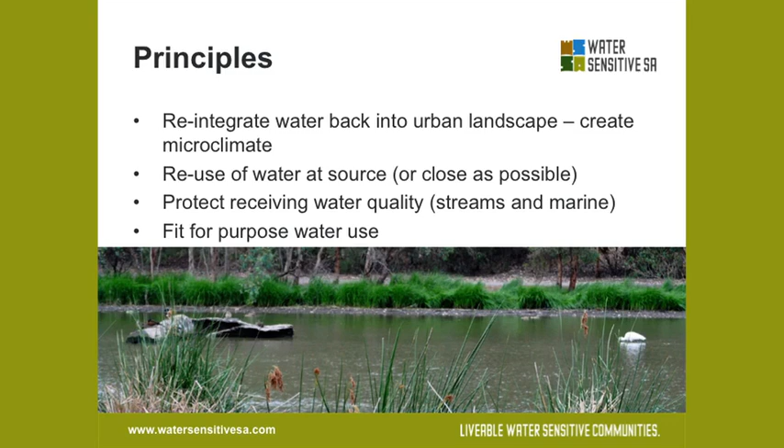Some of the things that really drive what we do, and I'll be putting quite a bit of emphasis on this tonight, is getting the reintegration of water back into the urban landscape, particularly to create microclimate for urban cooling. I'll talk more about the changes in the landscape from creating impervious areas, but really it's transforming our city, and we need to take the front foot and see how we can do things better, because increasing imperviousness is really a surrogate for loss of green space. So how are we going to get that balance back into the environment?

Also reusing water at source, or as close as possible to the source. Protecting the receiving water quality, not only the streams but also the marine environment. The stormwater discharges are having quite a significant impact on the seagrasses, affecting coastal sand drift because we've lost our seagrasses. So really what we're doing on our land is greatly affecting what's happening in the marine environment. And we're also looking at fit for purpose water use.

So often people will think water sensitive urban design is wetlands.

But it's also more than that. It's about looking at our recycled water supplies and how we can use that to green our cities and create prosperity. So I'm just going to give you Urban Hydrology 101, because it's really critical that the drivers we need to acknowledge for change are right here in front of us.

If you had a 1 hectare forest and you had 10 million litres of rain fall on that forest, you'd get about 85% of that would evapotranspire, and about 15% of that would slowly make its way through the soils to the stream and create that base flow that keeps our ephemeral streams rolling.

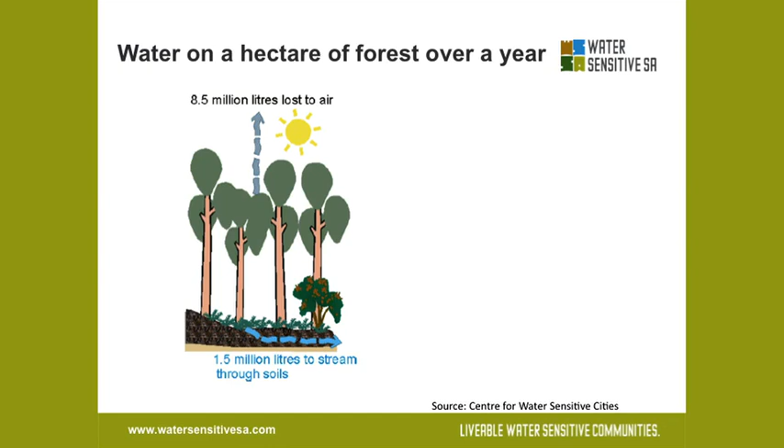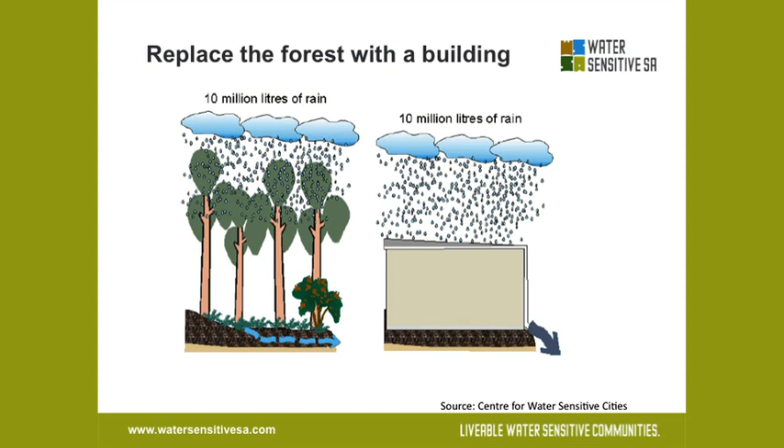But if that same amount of water fell on an impervious site - and to be honest, this site's 100% - we're getting most developments now looking at about 85% impervious, and that's just your normal domestic, let alone how a commercial site goes. So we're really creating quite an imbalance in the water balance.

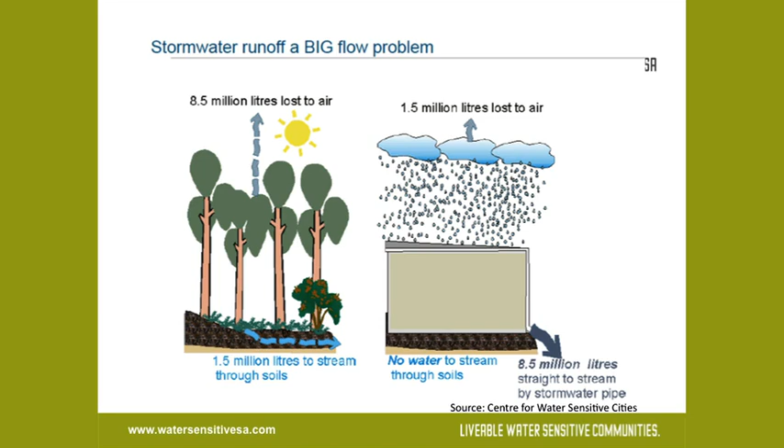So we'd end up getting no water go through to the soil. We're not actually getting any soil moisture, which is what we need to sustain our green spaces. Nothing's getting through to the soils, it's not infiltrating to the groundwater system, and we're getting 85% of that straight off to the water course via pipes, and it's eroding our streams, causing damages.

Now this looks very engineering, I'm sorry, I am an engineer, but really what the take-home message here is the little red line, the peak - that's the natural stream. That's the small peak. Over time, the rain will start, you'll get a peak, it'll drop away. Once we develop a site, the time to peak is much quicker, so we're getting more flashier floods. The actual peak is much higher.

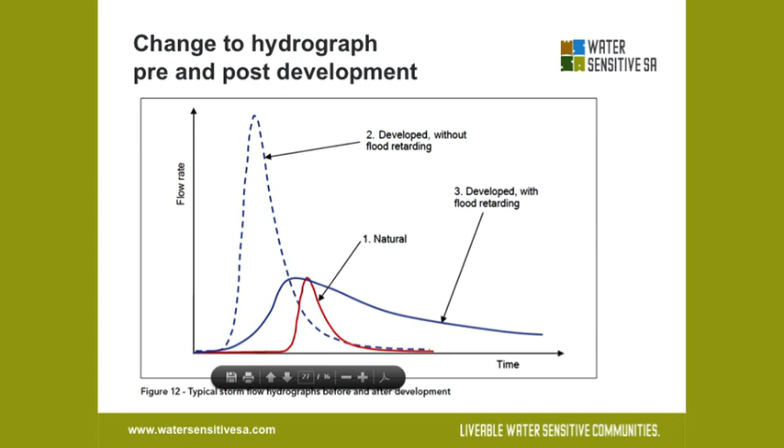And if you look at the areas under this - another bit of engineering for you - but the area underneath those curves represents the volume that comes off the site. So we're getting way more volume coming off the site. It's quicker, it's peakier, and there's more coming off. And we have to manage that somehow.

And so projects like this are going on in many, many places around Adelaide. If you look at St Clair, one of the newer developments as well, this is a wetland too. It's a bit more structured - to save space, they haven't gone with a sort of traditional environmental batters, it's quite formed. But this project treats the local catchment, and also treats water that comes from the Torrens, harvests it and treats it for aquifer recharge and for irrigation back on that public open space.

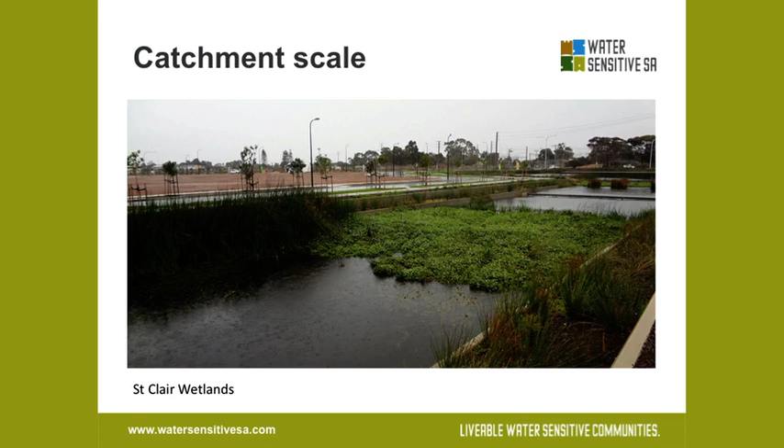So at a large scale, we get some really good economies of scale by treating the stormwater in these large systems. If you just take it down a step, to the precinct scale, this is just around the corner from where we are now. So if anyone's familiar with the Bowden area, this is Kevin Taylor Park, and I really, really love what they've done here - you wouldn't actually know that this is a stormwater treatment and management system.

That's actually a detention basin. So when there's high flows, that will fill and then it will slowly empty, probably over a couple of days. But what they've done is - this is quite an intensive development.

It's medium density, but what they've done is integrate the water management into the landscape so seamlessly that you don't know it's there. And I think this is what we need to be a lot clearer about.

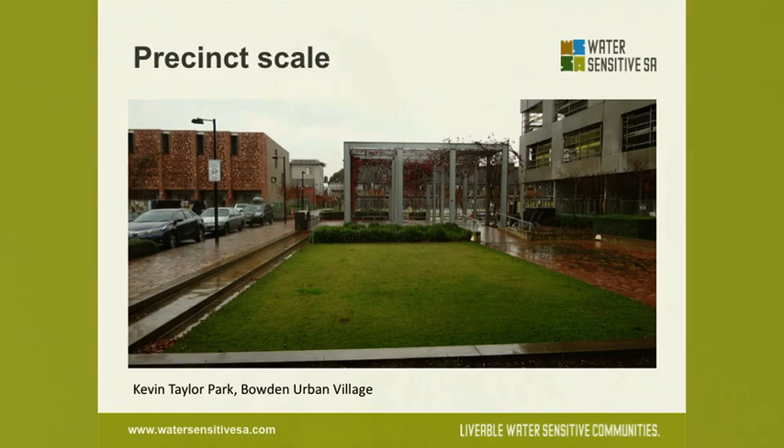I did want to put up a photo of what we used to do with detention basins, but I didn't want to offend the people who gave me the photo. We traditionally have just put in a corner block a pocket park, with steep-sided detention basins. It fills up maybe 12 times a year, and the rest of the time no one can use the park because the sides are like this.

So really, moving towards a better way of linking engineers with landscape architects to come up with better outcomes, and multiple use of public open space, is where we need to go if we're going to adequately deal with the amount of runoff coming off our urban catchments.

Some of you may be familiar with the 30-year plan for Greater Adelaide. It's just been reviewed. The original plan said we're looking for 70% of new housing stock from urban infill and 30% from greenfield sites. We're already at 67%, and when the next version is released that target will likely be 80% infill. That's a massive challenge, with more intensive development in our inner metro area.

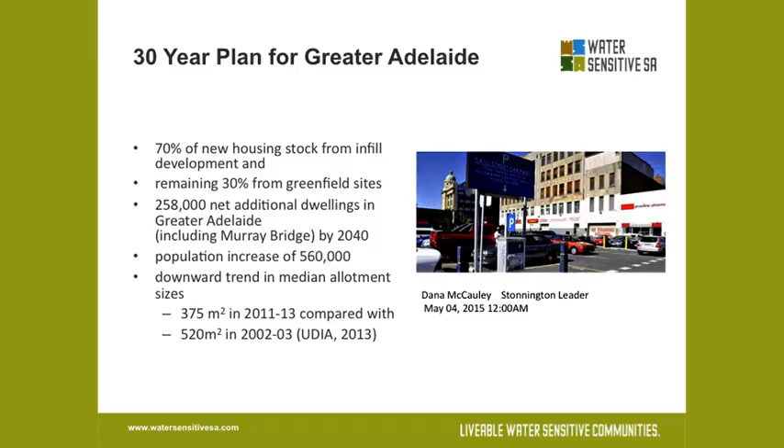Certainly infill development is the way to go to protect the fringe's biodiversity and farmland from urban growth, but we need to be a lot cleverer about how we're doing our urban infill. If you look at the figures, we've gone from a median block size in 2002-3 of 520 square metres to now about 375 square metres. So that space is running out, and there's not a lot of room on the block to deal with these issues, but some people are being quite clever about that, and I'll take you through a few examples.

So really, what this means is we've got a limited amount of green space, and we need to integrate with that. We're looking more and more at the streetscape and allotment scale having to perform some of the ecological functions that wetlands have traditionally done. So we'll be looking at harvesting at the allotment scale, biofiltration systems in the streetscape, and tree pits that take water straight from the curb and gutter to the tree, so it can uptake that water.

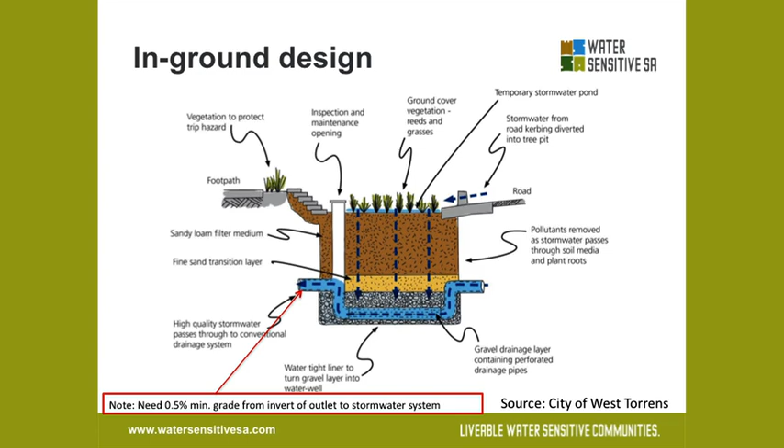So it filters through: there's a sand layer, a transition between the sand and the gravel layer, and then that bottom gravel layer—you can see where the offtake is—is actually a permanent storage. The bottom of the rain garden is impermeable, so it doesn't filter through to the landscape. We need that in Adelaide because we have such long dry spells between rainfall events, so that storage layer is very important to sustain the semi-aquatic plants feeding that rain garden.

So I just want to go back now down to the allotment scale, because I figured there might be a lot of architects here. I'm just curious, how many are actually architects in the room? So a bit of a mix, okay.

So I try to think, rather than talk about real engineering type stuff, I'll try to talk about how at the allotment scale we can actually try and achieve some of these things, because at the moment there isn't a mechanism if you're not part of a large-scale development where you contribute to possibly a wetland, possibly a street-scale system. How can these types of developments contribute to getting that balance?

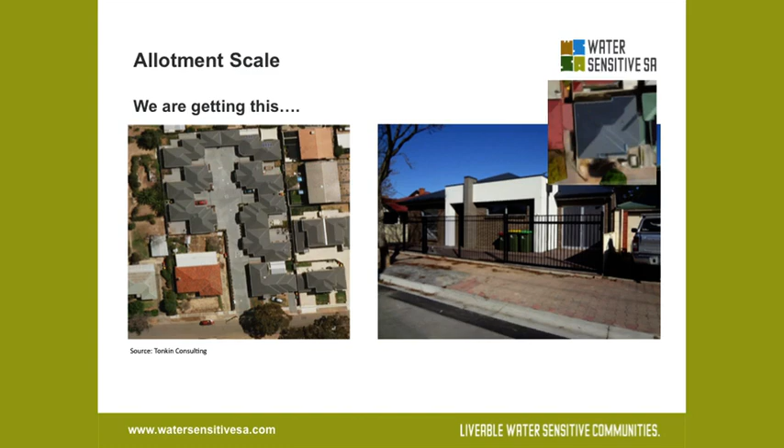And this one on the right, I don't know, this block, it's like 90%, I think it's about 100% impervious. I can't actually see anything green on that block. So we are allowing development to occur that is just denuding the site of anything remotely representative of the environment. And there's nowhere for the stormwater to infiltrate.

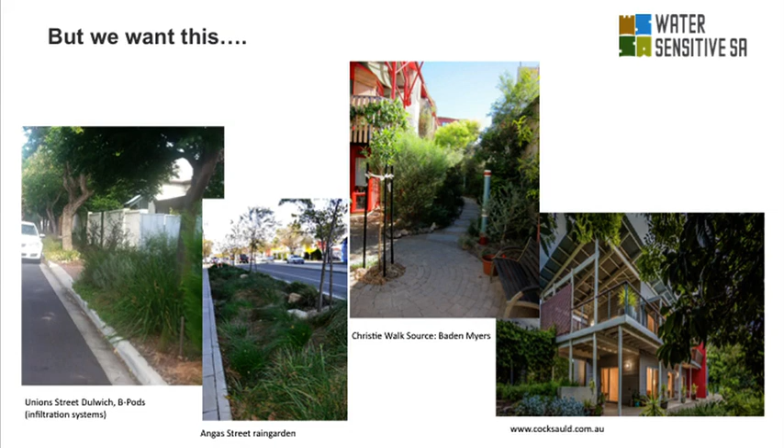So what they did was they introduced what they're calling B-Pods, and in the verge is a crate wrapped in geofabric, and the rainwater from the roof pipes of each house connects to one of these B-Pods, and then it infiltrates water after a storm, providing water to the trees in the local street. Very simple, pretty cost effective, about $500 each household, but it's sustaining a beautiful streetscape, and it's amazing.

You can't actually find a spot almost in that verge that's not planted out by the community. They've even got lettuces and goodness knows what else growing out in the streetscape. So go and have a look if you're ever in Dulwich - it's a great example of where water sensitive urban design can also facilitate community greening.

Well, that's probably all I want to say about that slide. So really, allotment scale solutions - I won't go through all of them in detail, but just to say that on-site detention is our traditional answer, and quite frankly, I don't support it. All it does is prevent flooding downstream, but it provides no benefit to the landholder who's paying for it.

So they put all this money in, put in a detention system, and then people downstream benefit - they don't get any benefit. Much rather see a retention scheme, which is when you hold the water on site and reuse it. A detention scheme just holds it till the storm's over and then releases it slowly, or not necessarily till the storm's over, just start slowly releasing it.

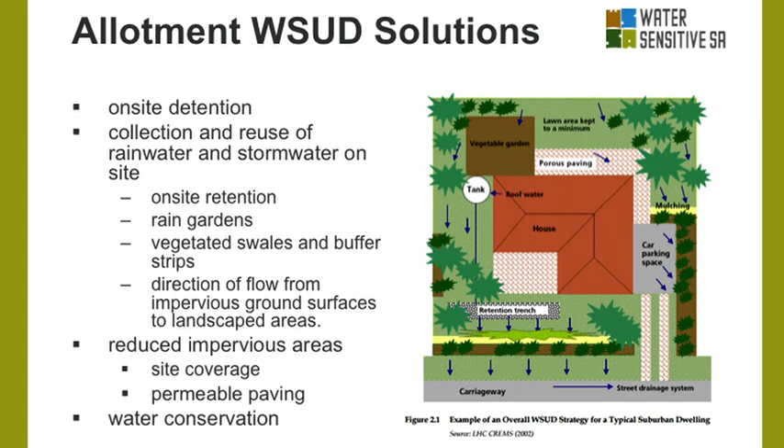Retention, on-site retention, reuse on site, rain gardens, vegetated swales, and really reducing impervious areas is one of the things I think we could be looking far better at. That's where I feel we've traditionally worked with engineers, landscape architects and planners. I really think it's about time we started working more with the architecture industry and with builders, because they're the ones that are going to have the greatest influence on what the urban landscape is going to look like in the future.

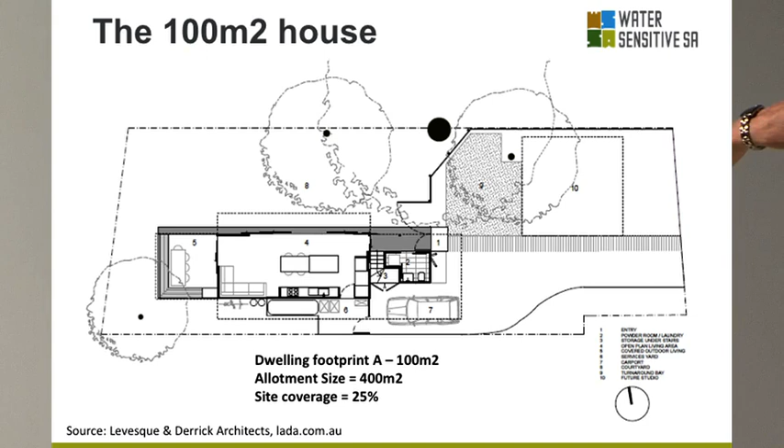So this is the 100 square metre footprint house. It's owned and built by a chap called Matthew Levesque, I hope I've said his name right. He's in Brisbane, and this featured in Green magazine, if any of you read it. His block is about 400 square metres, and he's managed to contain himself and only build 100 square metres of it. The rest is still green, and can still provide microclimate. The big dot on the top there is an existing mature tree. Obviously he's tried to save that tree, whether he wanted to or the local planning laws made him, I'm not sure. But what it's done is create the basis for a great microclimate there.

He's got a rainwater tank, a 5,000 litre rainwater tank just there. And he's only got 25% site coverage, which is a massive contrast to what we're seeing in Adelaide. In Adelaide right now, that site probably would have been typically developed up to here.

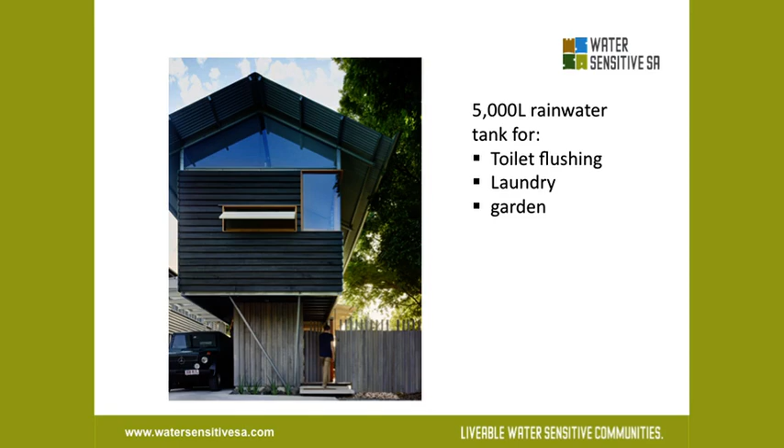And so his rainwater tank is used to flush toilets, to do the laundry, and for the garden. With a 5,000 litre tank in Adelaide, I probably wouldn't recommend you did all that with it, because we have such dry spells throughout the summer. You wouldn't have enough water to do all of those things.

But in Brisbane, they have lots of summer rain, so their tank would be topping up. I haven't gone through it here, but we've just released on our website a rainwater tank size selection table, so people can go through looking at roof area versus your applied use, and how much roof area you've got connected, your size of tank, so you can try and size the right tank for your household.

But if you also have a look here, you can see that mature tree and the green space he's left, and it's really quite a modest development. I really just want to put the challenge out there. I'm wondering why we're not seeing the value in creating a more modest footprint of development and leaving some of the space we own for green space, for water sensitive urban design features, and basically to create microclimate. If you look at the case study, he's also got lots of other features about cross ventilation and good insulation. So for those of you more in the built form, you might be interested to see that.

Other ways about minimising impervious surfaces: if you're involved in a larger scale development, having all of the garage backing onto a back laneway reduces the need for a driveway, so that's even less unnecessary impervious space. That's one way you can do it in a larger scale development. But even in your own backyard, I'm not sure why you have to concrete everything - the wheels only go over a certain strip. Why are we making the whole area impervious for a driveway?

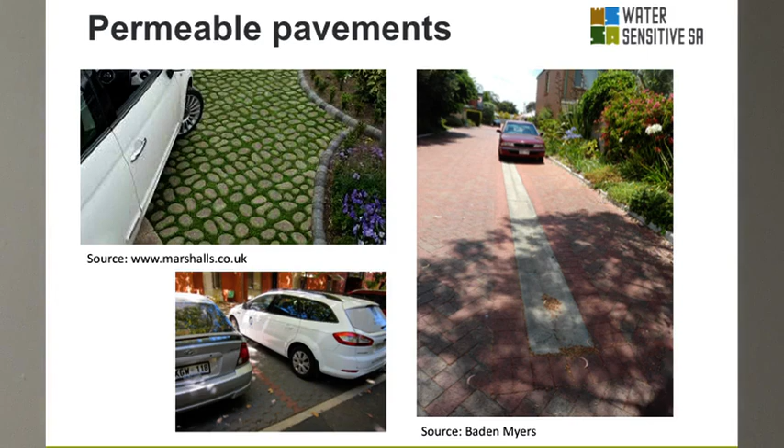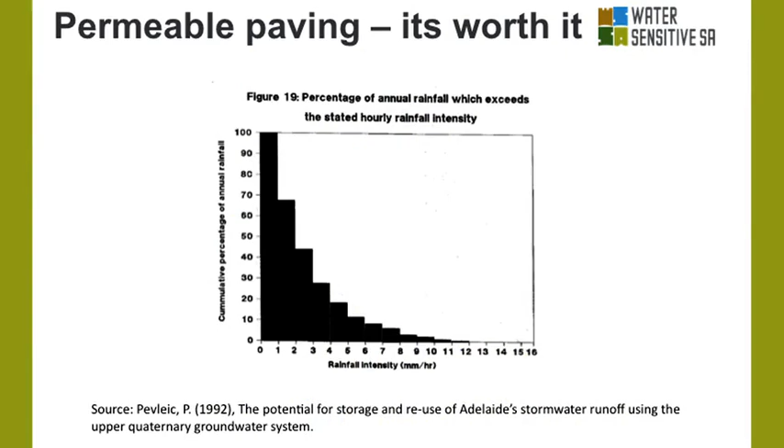At the moment, in many areas, we've got trees trying to grow in very little soil, and they're not being very effective. Just to be mindful, this graph shows rainfall intensity in millimetres per hour. Most of our events are in that 1 to 2 millimetre per hour range, which can easily be taken up by permeable paving or some sort of pervious surface. So by having pervious surfaces that aren't going to shed water quickly, we can actually manage a lot of those small events just on local sites.

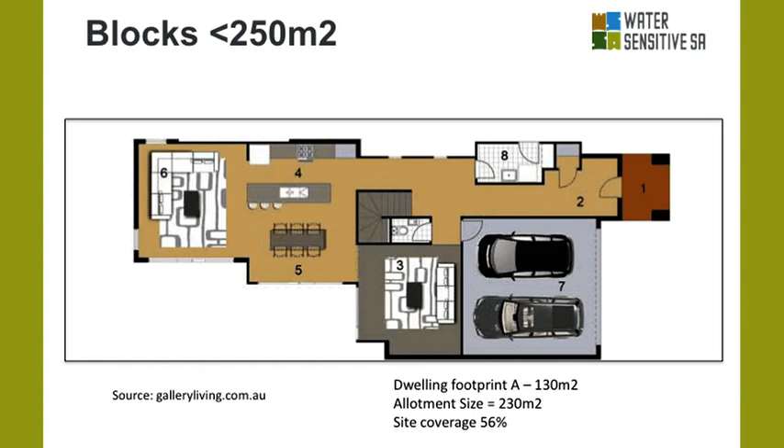This is just a standard off-the-shelf development that's out there at the moment. As a designer, just thinking about how you can create nooks and crannies in your footprint—because basically you have to have a metre off the side of the building, off the boundary, in most cases for a detached dwelling—but once this is fully built out, there's no room for anything like a rainwater tank. So people were saying, well, I can't fit one in because there's nowhere for it.

With a little bit of thought for design, and these little nooks, there are all sorts of rainwater tanks of all different shapes and sizes that could easily be slipped into these spaces. In this little nook, we could have two of these slimline rainwater tanks. We could have—believe it or not—that's a rainwater tank too. I can't believe it, I was looking for small tanks and I found this.

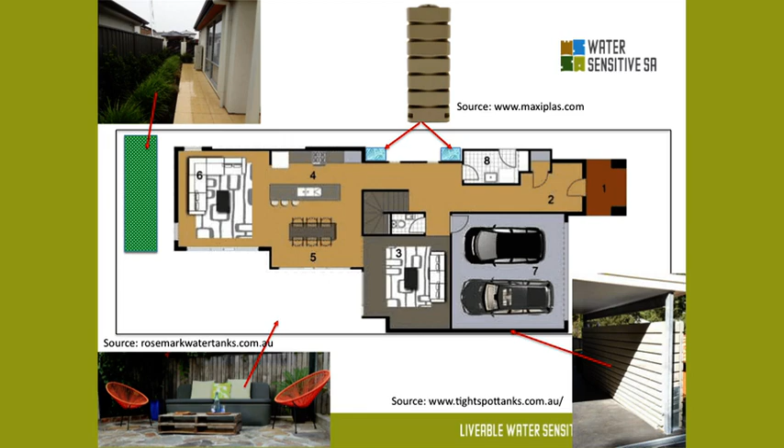Having your outdoor seating area double as a rainwater tank for storage—people are producing these things. They understand that we've got small courtyards, not a lot of space, and we need to be using them better. The wall of your garage can actually be a rainwater tank, a slimline rainwater tank. So they don't have to take up a huge amount of space if we're just a bit smarter about how we try to integrate this.

This is the same development. At the back is a landscape garden that could quite easily be a rain garden. It's not, because of the way the property is oriented—all the outdoor living space is here, so this is probably going to be underutilised space. There are actually downpipes here and here that could run straight off into that rain garden. So just thinking about how we orient the building can facilitate water sensitive urban design and harvesting quite simply. And that's just another shot of that garden.

Another form—this is more of a detention system—but you could also have storage under the front driveway; there's no reason why we can't do that as well. So I'm really just putting the challenge out to you: can we be doing our built form differently to facilitate allotment scale solutions, because that's where the vast majority of the opportunities are going to lie looking forward. We need to start seeing some innovation in that space if we're going to create the type of cities we all want to live in.